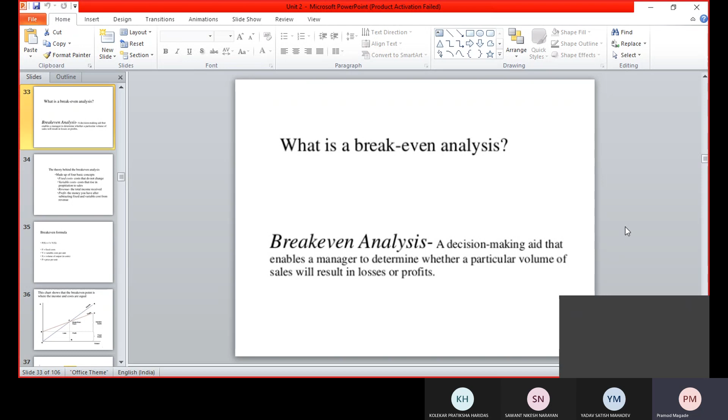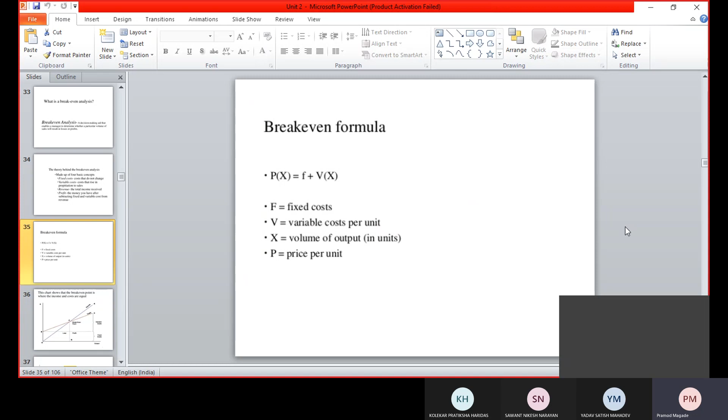Now in break-even analysis, we have seen it is the point where profit gets started. For that I have given the curve. The basic three parameters are: fixed cost, variable cost, volume of output, and price. This I already taught - I'll share this screen and PPT in the group too. Now here break-even analysis means the point P beyond which we get profit, and below that we get loss. So the designer or developer should know what should be the limit of this break-even point.

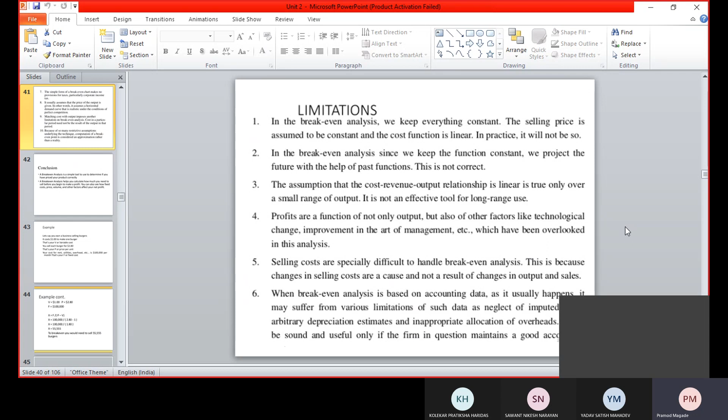So for that I have given one example, with limitation benefits explained. Suppose one burger is made for $1 and the price from a market point of view is $2.80. So it means almost $1.80 gets the profit. And if I sell 1,000 of these, and I want a profit of $1 lakh, in that case I will have to fix the P value.

So how can I fix it? This will be the formula: X is equal to F, meaning fixed cost, divided by P, meaning price, minus variable cost. So the X value comes to 55,555. It means the break-even point of that particular product is 55,000.

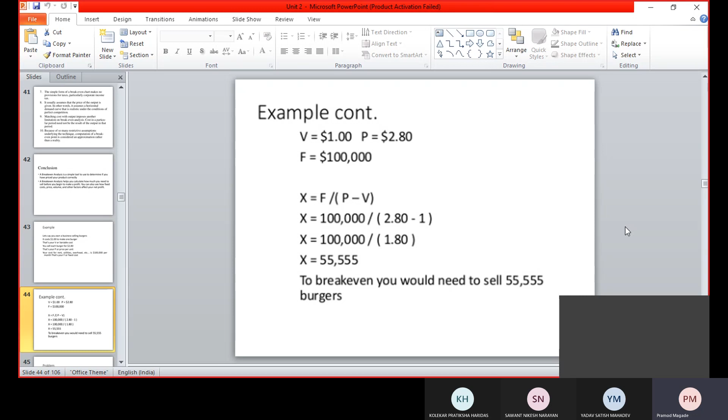What does that mean? Beyond 55,555, I'll start getting profit. So the developer should know the minimum number of burgers they will have to develop in this case. Okay, so another example I have also quoted.

I'll share the screen, share this PPT also - here too I had explained this. I think Pratiksha was there in this lecture.

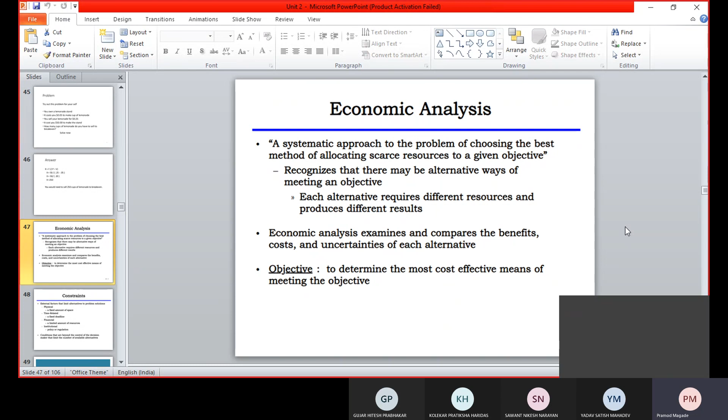In economic analysis, again the same parts are considered: short term, intermediate and medium, and micro and macro economics. After that, these are the factors: physical, time related, financial. So basically I'll tell you - in any product development, or any new product development case, only engineers are not there. There is an account department, there is a proper quality department.

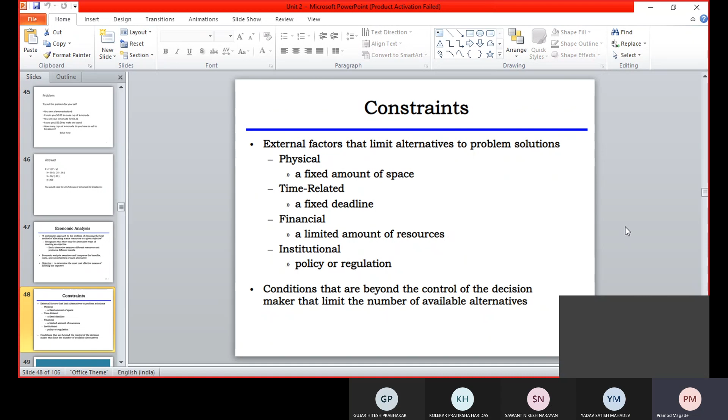All departments are there which are needful. The constraint is that the financial department should be included there - then we'll get the actual financial or economic analysis from their payment point of view, from their surplus charges point of view. Records should not be kept by the engineers - there is a financial department for that. Now I had discussed the FAST method, which is related to the function analysis system technique.

So this means within less time we'll have to do these things: make the function, decide the function, make the analysis, and start the procedure for completion or implementation. So that's the basic about fast analysis. It will not spend much time.

Suppose I am developing a product, and after planning I decide that after 5 years I'm going to launch this. Then it's not that good or that sellable, correct? So the fast method means we'll have to understand the need of the upcoming future.

Right now we can take the example of electrical vehicles. They are in the market, but electrical charging stations are not there like petrol or diesel stations. That structure is being built, and it will again require 2-3 years. So likewise it will work.

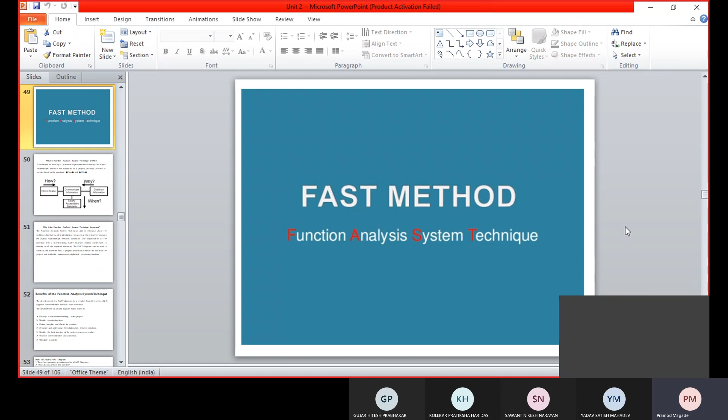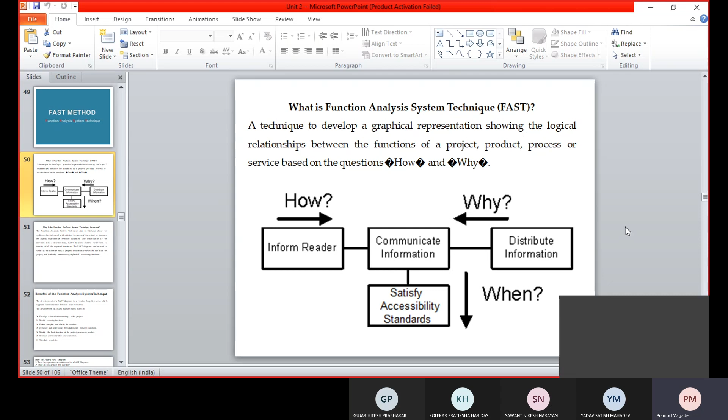So fast analysis gives the idea that whatever you are going to develop should be developed within less time, in an appropriate, good quality way. Here the WH questions come while deciding this: why, when, what, where, how, and so on. The designer should ask these while designing the new product, and after that he will decide what to do.

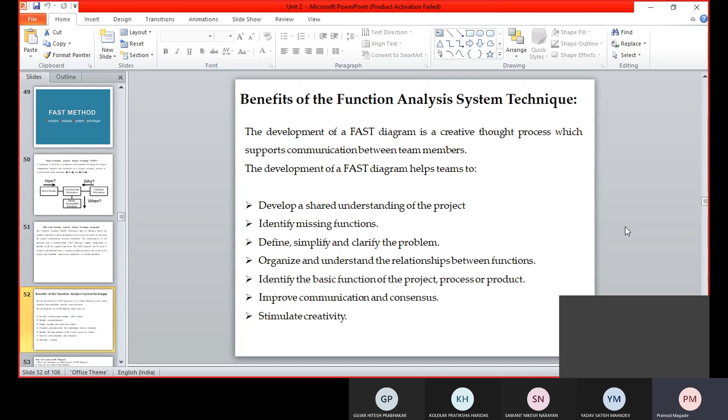So I have explained the benefits thoroughly. We can identify the missing function - meaning previously developed things, and now I am going to develop new things. So the gap in between, that I will have to consider as the missing function. These are some of the benefits I explained.

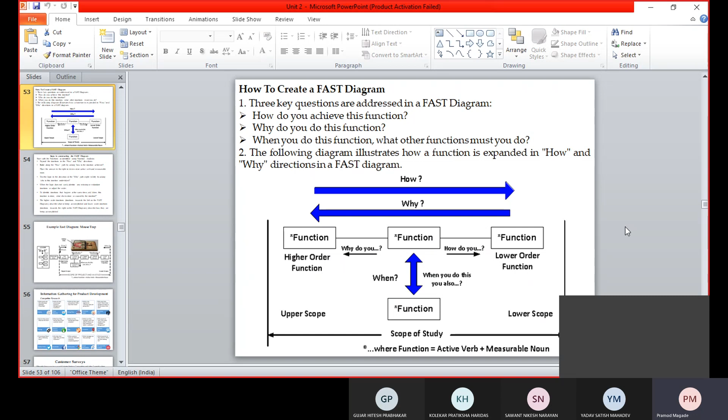Now how to create a fast diagram? Of course we have to consider the answer for the WH questions - that is called a fast diagram. That's it. Now the steps in fast diagram.

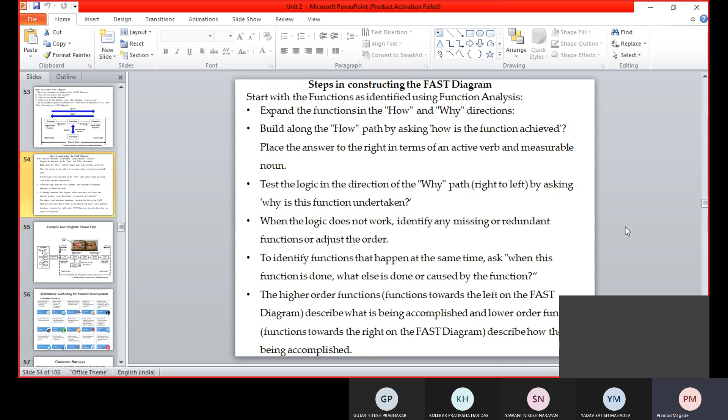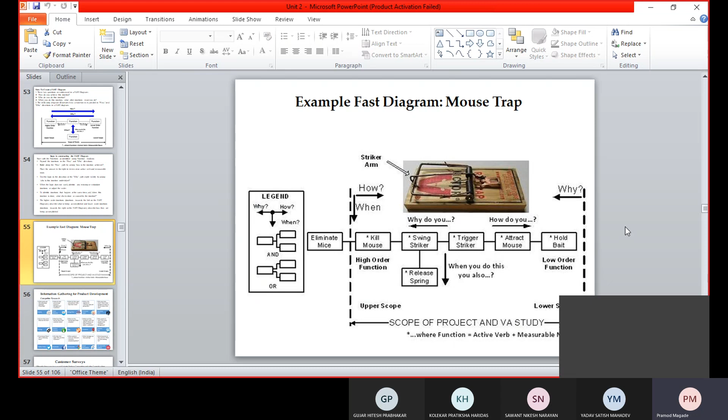You can take this example for any product development also, and we'll have to compare the previous product development span and the current development span. That is also a fruitful thing while using the fast method.

After that, gathering information is very important. The fast method is not like we decide we'll do it within less time and go directly - it is not possible. There are a lot of resources, a lot of things to consider.

A market study is one of the important things. In this market study we'll have to consider the requirement. The requirement is very important, and according to that we'll have to proceed.

As an example, in this corona pandemic, the mask was established. It's not that masks were not used before - doctors and nurses in hospitals had mandatory mask use, but now it's mandatory for everyone. So the inventor or developer decided on this, searched accordingly, developed the mask, and gained profit also.

It's not that mask developers recently developed masks suddenly - they had to do research for new types of masks. The pandemic situation started last year, and in that case we used cloth type masks. Right now various types of masks are there - a whole variety. That is the developer's point of view.

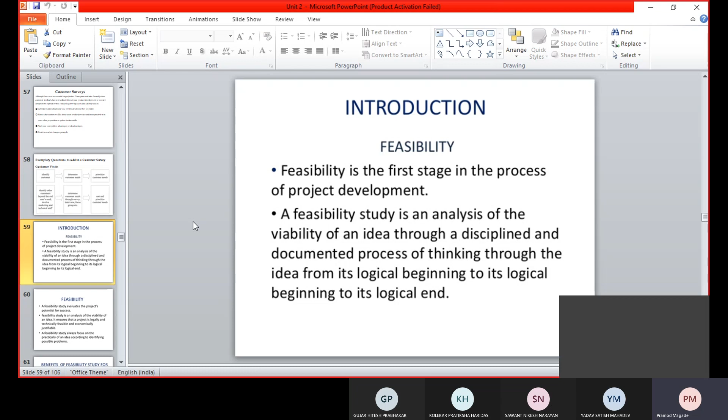Every time I will not use a lathe machine, suppose various operations I have to perform on a lathe, but unfortunately only one operation can be performed on a lathe at a time. So if I have a number of operations to do, I will have to purchase 10 lathe machines for 10 operations. Instead of that, go for CNC, go for VMC. Likewise, feasibility is there as per the requirement.

So I have discussed these benefits and all that, the common things are there. In our syllabus they have mentioned technical feasibility. In technical feasibility, they have mentioned how from a technological point of view you can decide the feasibility.

Suppose someone develops a mechanism, in the case of theory of machines lab, from a student approach or institute point of view. So technical feasibility means that the product should be workable. Though it will not give the output, it should be workable, because the student can learn how it works.

Suppose a single crank cylinder is there, or a single acting cylinder is there. If we thoroughly or theoretically tell them, they will not understand. Instead, we can show the single acting cylinder, what is the TDC, what is the BDC, and how it works, and why single acting, non-single acting, and what is the difference between single acting and double acting. Then the technical nature, the things fit in the student's mind. So that should be the technical feasibility in terms of the student's point of view.

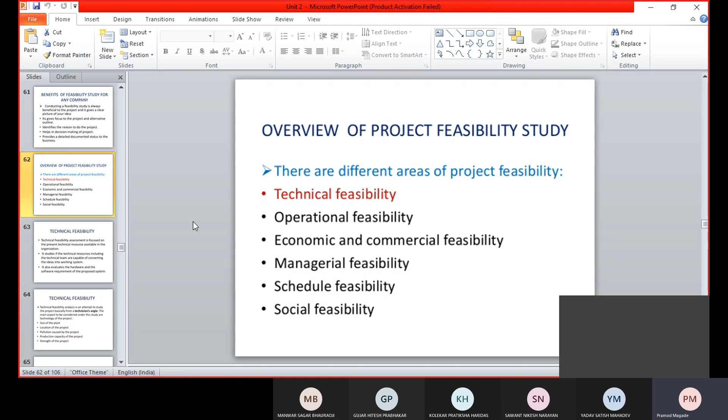So both the worker and the engineer should know the technical things, and if both know, then technical feasibility will occur.

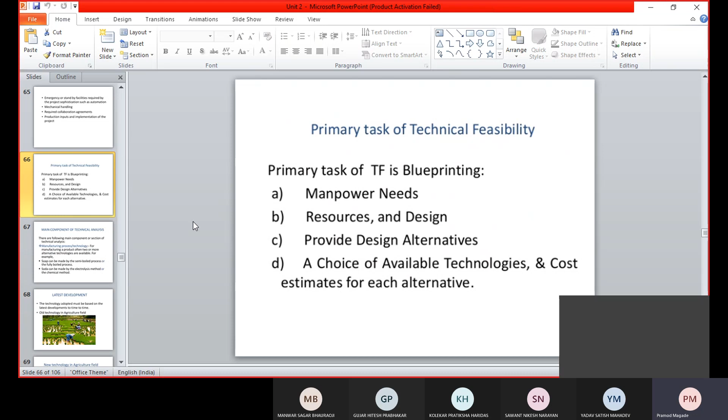Now these are the main components. We have seen the manufacturing process and all that.

The latest development in case of the product: earlier the farmers were working in this way, and right now also in village areas this kind of scenario is there, with a number of people charging some amount for a day. But right now, from a recent technology or development point of view, this kind of machine will help do the work of all the people. So this will be the new technology.

This is as per the demand, so within less time we can do the things. So likewise, the grass cutter is actually this. Now these are the various agriculture point of view things I have explained here. So here solar, wind, renewable energy are also there. We can use this. I think you might have seen the machine also, so that can reduce the human effort.

So up to this point we have covered. I hope this gives you the overall scenario of what I taught in the last session. I hope you get what I have told. Satish sir, are you getting it? Yes sir, yes sir, yeah.

Okay, now we'll have to reach our next point, which is measurement. Measurement is nothing but the condition which satisfies the things. Basically the measurements are related to, suppose I want to decide the length of a mechanism. In this case, what should be the length that I should define by the designing? First thing, second thing, past experience. On the basis of that we'll have to decide, and then we come to know.

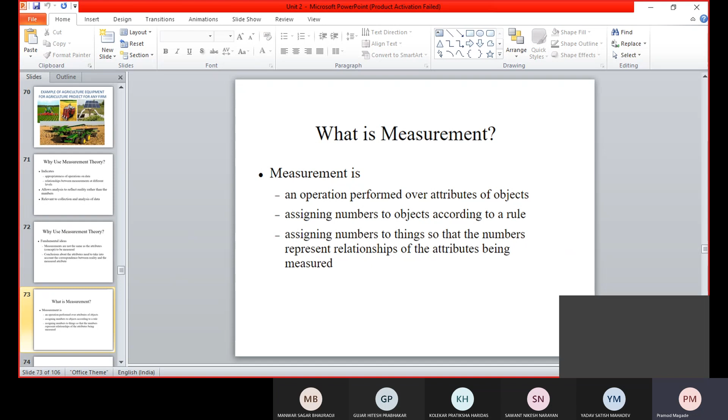Now the conclusion, you can see what is measurement, the conclusion of the statistical analysis. It will build in reality, and it is an attribute which helps to measure things in an appropriate manner. So that is measurement, and for that I think in MQC, the subject we learned about, the vernier caliper and various devices where the least count is there. So mercury level also we have to define to the direction. So likewise, measurement needs to be defined, and through which we'll have to satisfy the need of the customer.

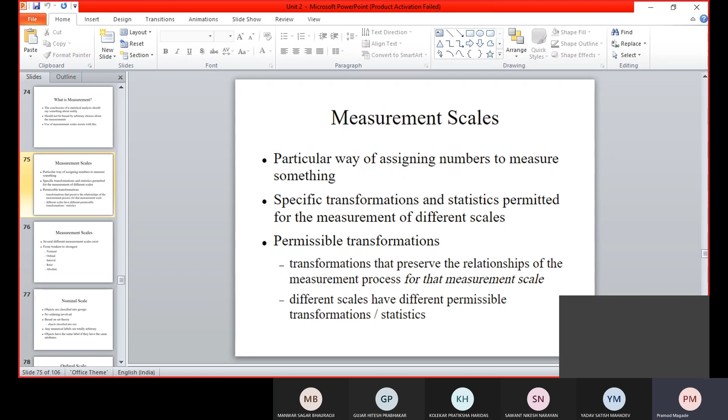Now there are various scales, so few I have explained. The nominal measurement means length, width, height, breadth, so that we can define. Ordinal measurement, interval measurement, ratio measurement, absolute measurement, that again depends on application. So you can see the nominal, as I told you, height, width, that will be the nominal, and that can be easily measurable by a tape, single tape or scale.

And that is important. Then ordinal means what? While defining the things, some categories are there, we'll have to define a particular height, so that will be the ordinal measurement. Suppose the boiler is running and I should maintain the boiler temperature, so for that, measurement is done by thermometer, and that thermometer again has some range, some scale. So that scale should be there. Whatever thermometer we use to measure our body temperature, that thermometer range is different. And in an industrial point of view, as per the application, that comes under ordinal scale.

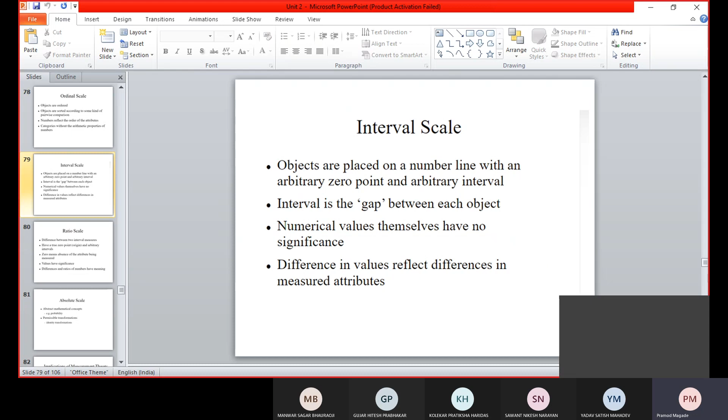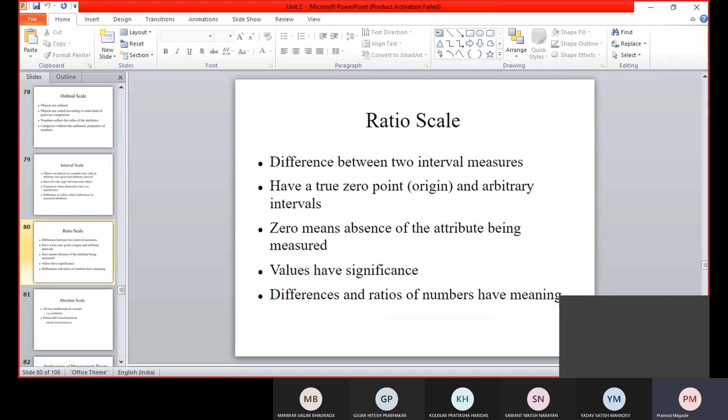So there are a lot of scales. Interval scales are there, somewhat wherever necessary it can be used, that will be the interval scale, not regularly used. Ratio scale, so ratio scale means what? We'll have to define the comparative analysis of the particular object, so that will be called a ratio scale. So these are the basic scales.

And absolute scales, of course, absolute means we'll have to define the particular with some accuracy, so that will be the absolute scale. We cannot say the length of, we can see in case of the particular length of any machines, we cannot increase or decrease. There will be the scale, and there is a requirement as per the standard, so that we call absolute scale. While sitting on a chair, that is again absolute scale.

Why? Because it depends on the customer. When I am developing the chair, if the chair is situated in the library or reading hall, that shape is different because it should be comfortable. The chairs or stools situated in the practical hall are different because you will have to just spend 2 hours there, not more than that, that's why there are stools. The chairs required for any program for a long time, suppose 5 to 10 hours, in this case the chairs are different. Chairs for a seminar hall are different. So this comes under absolute scale, and measurement is done on the basis of the requirement of that particular application with respect to the people.

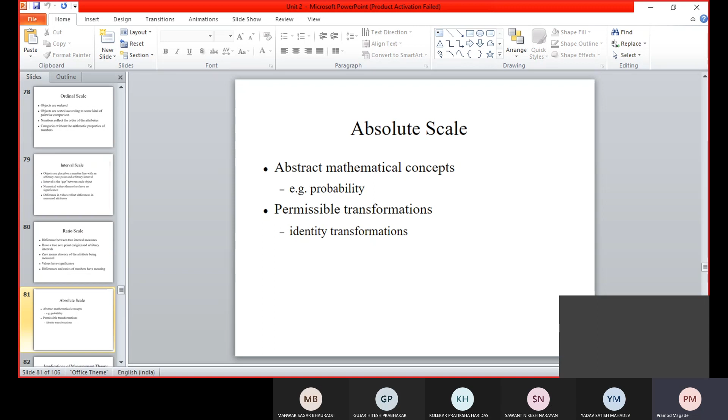Okay, so this is about the measurement theory. Somewhat I have mentioned here the implication of the measurement, so that is necessary, and measurement is important. Now, 'caveat' is the term which means that no error will occur, so that should come in the measurement. So real world measurement we can say like this. So this is about the measurement.

The question will be asked in this measurement point of view, about the ratio scale or ordinal scale. With respect to that, they will ask the question in MCQ manner.

Yes, sir. Okay, this is just things, and uh...

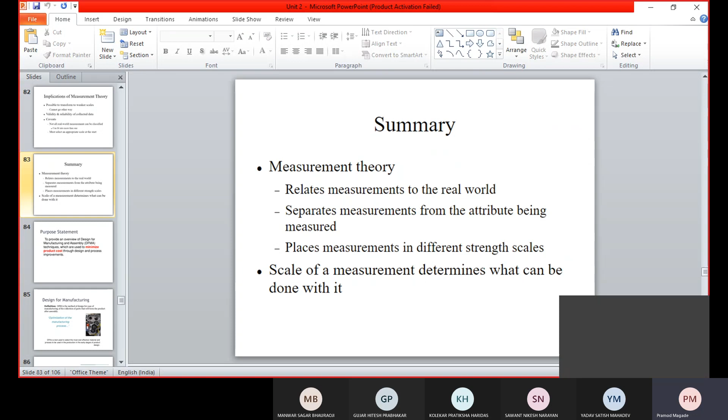We are running in the second chapter, second unit. We have been learning the things. Now next part of the second unit, here is the summary, why the theories are required and all that.

Now the next part is DFMA, that we are going to discuss over here. In case of DFMA, basically the purpose I'll tell you, DFMA is nothing but design for manufacturing and assembly. So there are two terms, manufacturing is different, assembling is different.

We'll have to study first DFM, design for manufacturing, and then DFA, design for assembly. Combining these two gives us DFMA analysis. The intention is to reduce the cost of the product and time while developing things - that should be the purpose of DFMA analysis. We'll have to understand the assembly, the design, the manufacturing process, and then go for implementation. After implementation, whether it is suitable or not comes after testing. So this is the overall structure for DFMA analysis.

Write down the title, DFMA analysis - design for manufacturing and assembly techniques. Manufacturing and assembly we need to consider here, to reduce cost, reduce time, and reduce the design process, through which improvement can be achieved very easily. This is about DFMA. We'll see one by one.

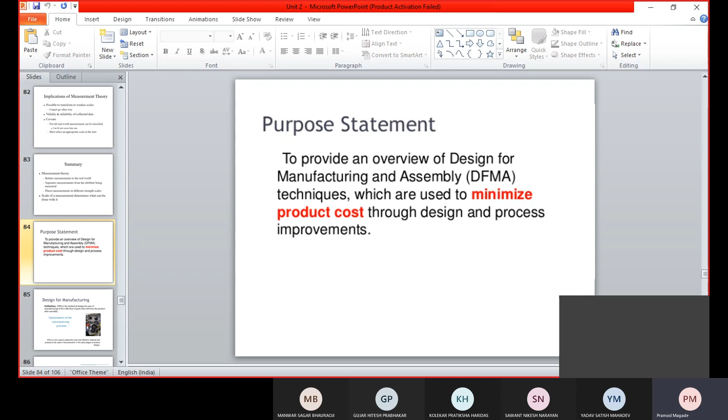First, design for manufacturing, DFM. DFM is nothing but a method of manufacturing. We'll have to develop the manufacturing method with respect to the designer as well as the production engineer or developer. The gap between designer and developer is: the designer should develop things as per the appropriate design point of view, while the developer or manufacturer will have to think of the process through which the component, project, or assembly can be completed easily without wasting time.

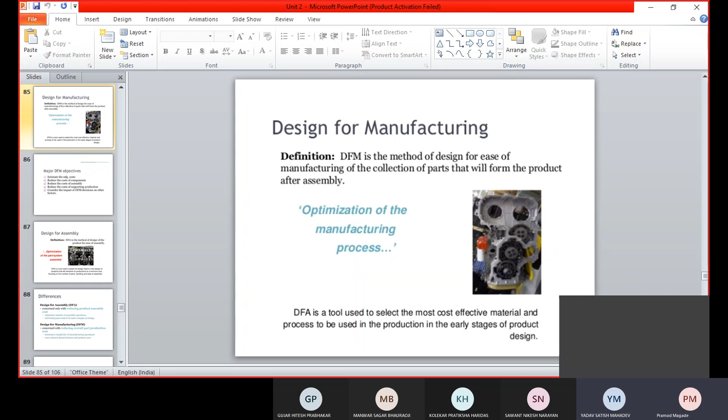Tell me once it's done. Done sir, done. Okay, now this will be the objective, you can write.

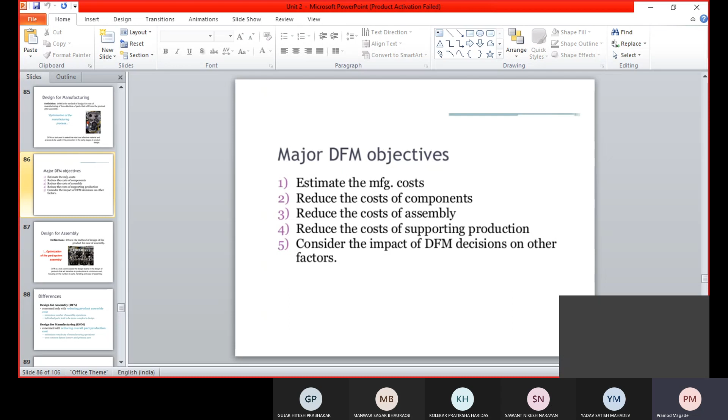Now in case of assembly, whatever manufacturing things are there, they should connect in a proper appropriate manner. I think you've heard about the Tata plant - they have developed the detail product, and assembly can be done in Gujarat. Many times Ashok Leyland was also the same - the detail parts developed here and sent to the south region, Tamil Nadu, for assembly. This gap can be minimized only by proper measurement or proper manufacturing.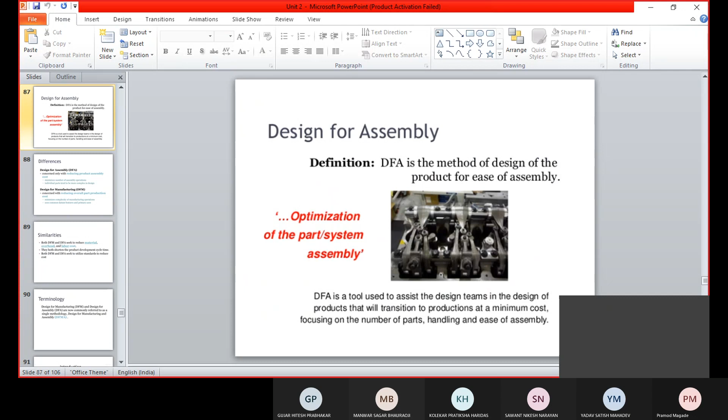So you can write down the similarities, but instead of that, first write down the differences - we must know the differences. Just write down a few points: DFMA, in case of DFA - optimization of part assembly techniques. DFA. And after that you can write the differences.

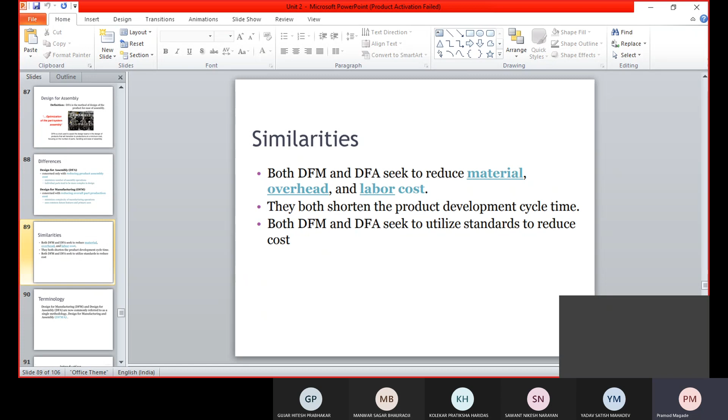Okay. Now this will be the terminology. Both things will have to combine. We can say it is called DFMA analysis. Now additional part I have mentioned over here, a few slides I got. I thought this is important. So DFM, this manufacturing related to the assembly, we have seen.

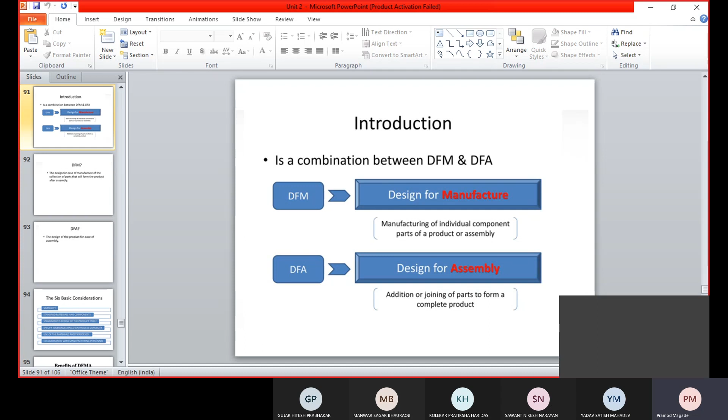Assembly means joining of the parts with the specification, and manufacturing will have to use the process. Now DFM, same thing I just read: the design for ease of manufacture is the collection of the parts that will form the product after assembly, and DFA is analysis related to ease of assembly.

Now six basic considerations will have to define why this DFA and DFM will have to be done. Of course, for simplicity, we need to use standard components, materials. We have to use standard design. We have to specify the symbolic representation.

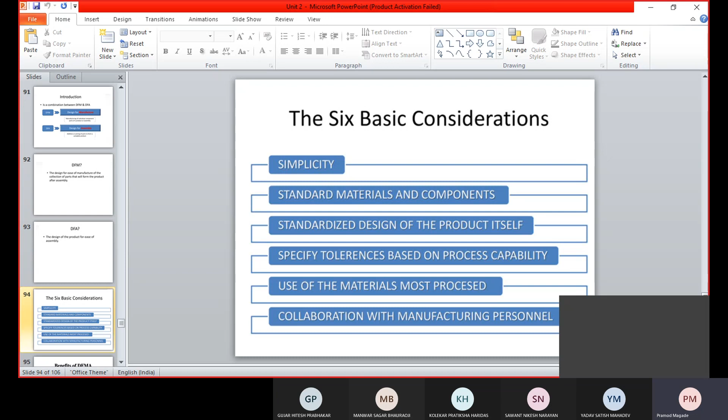This benefits, first of all, of course, it will reduce the time, it will reduce the cycle time, it will reduce the cost, correct? So a few more points you can write for benefits.

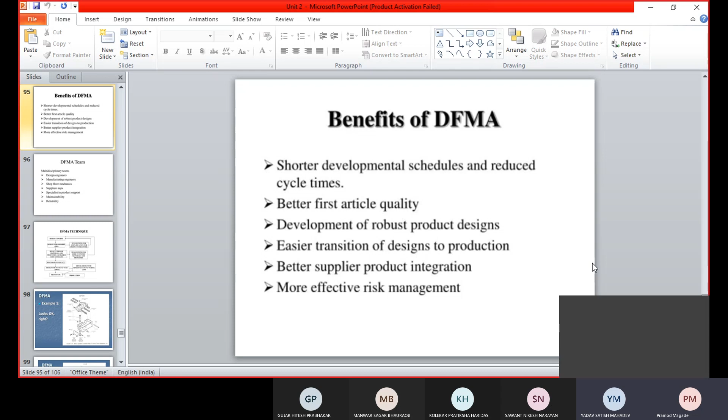Okay, so these are the benefits. Of course, DFMA team is related to the combined efforts of designer, manufacturer, production. So all should be included. Now here is the technique.

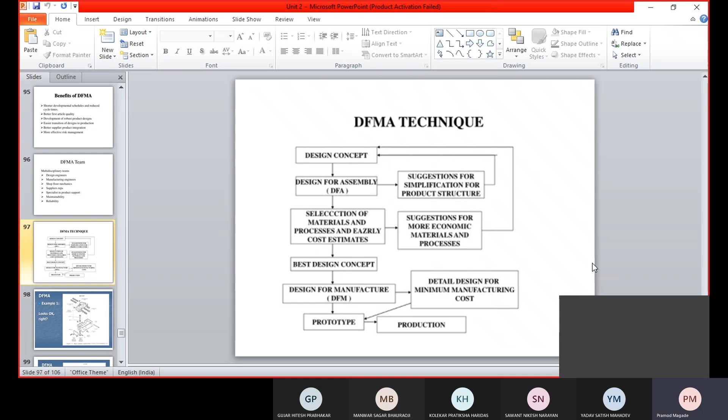So basic concept, whatever we have discussed, that is mentioned in the point block diagram. Same thing is there here. Now here is one quote, I have an example, I got this example.

See, this will be the previous part before DFMA analysis. So the number of parts are there, and for that we'll have to maintain the assembly. So lot many things we'll have to design, then develop, and then it will get assembled. Many times what happens, due to number of products, the chances of missing things, missing parts, missing nuts, missing screws will occur.

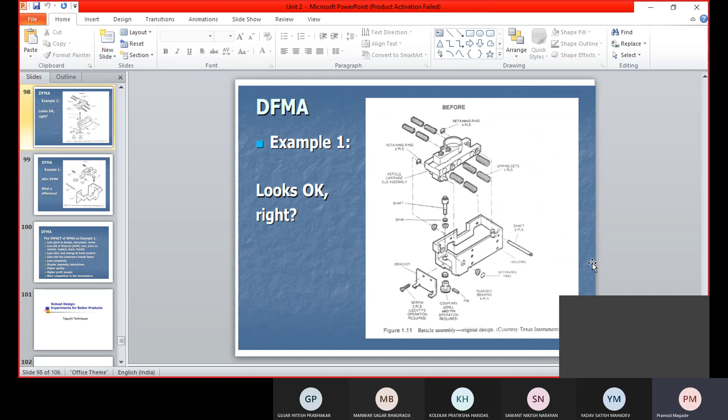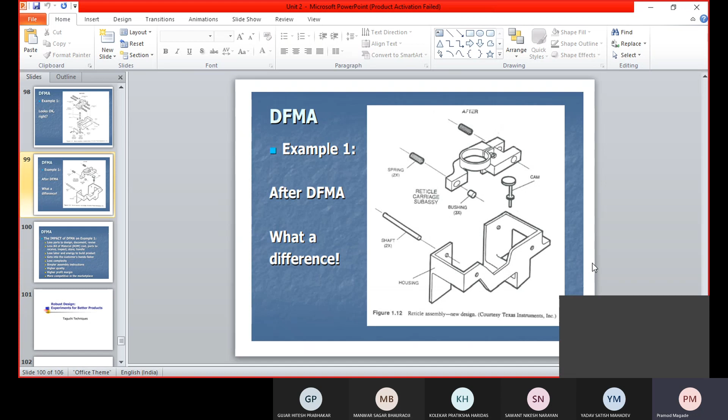So this example I got from a research paper, one of the research papers. That's why I have quoted it over here. So I hope you understood about this DFMA. Now, in the additional point, I have mentioned over here the comparison between before and after. So no need to read from my end. I hope you understood this.

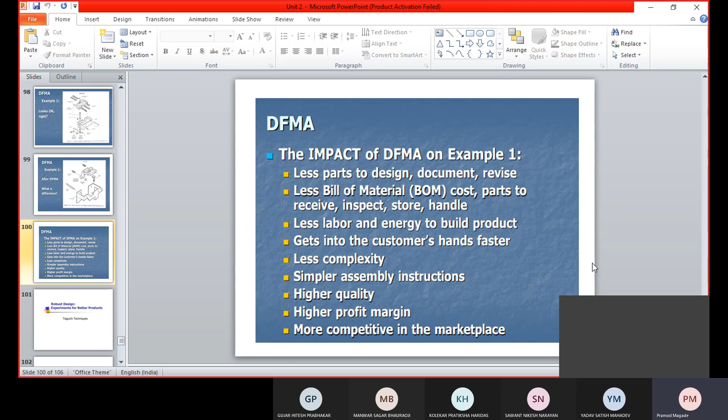Okay, alright, let's move to the last part of this second unit, which is Robust Design. Robust design is nothing but the design which will sustain for a long time with great quality or better quality. So can anybody tell me what is robust design from your point of view, so that we'll discuss?

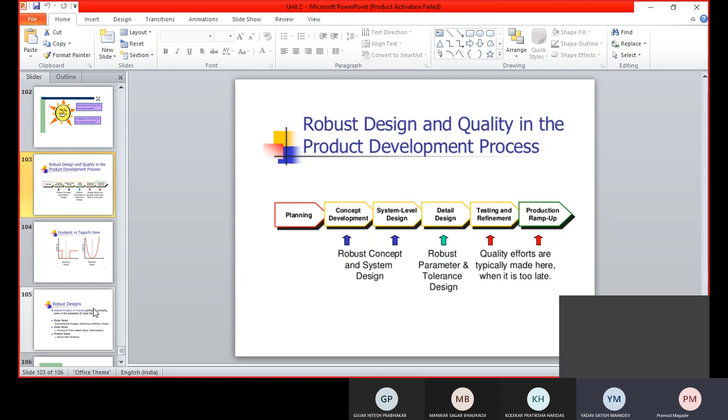Yes sir, yes. So this is basically robust design.

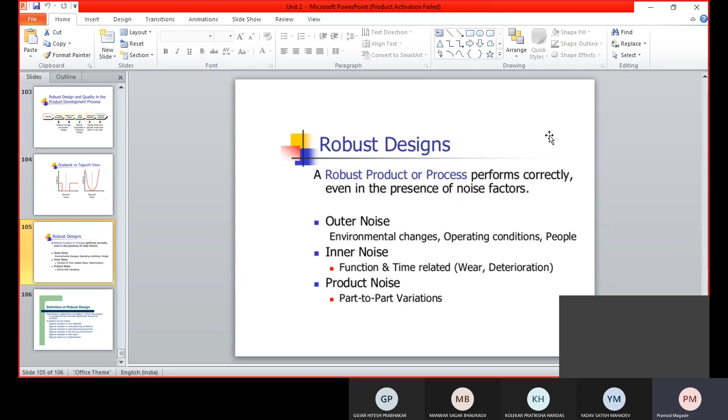Just write down the things.